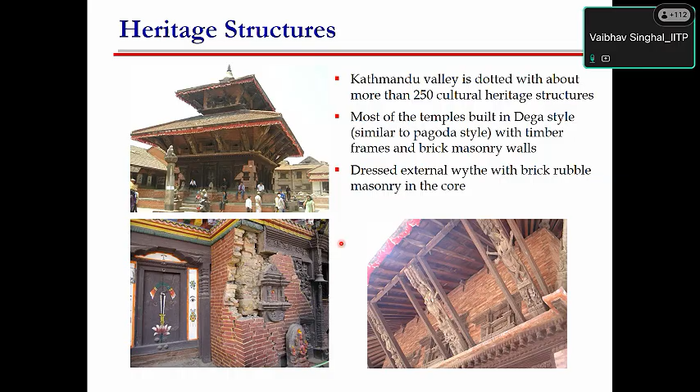This is one photograph after the Nepal earthquake, and especially in Nepal, in Kathmandu, there are a lot of heritage structures. In the southern part of India and in the northern part of India, you see there are a lot of heritage structures all throughout India and many neighboring countries. So why has this seismic evaluation or assessment of masonry gained importance, and why is it important for us being an engineer or being a researcher?

If you know about the recent earthquake, it is not recent, but I can say the recent one which is known to be a mega earthquake or a major earthquake, which happened on the India-Nepal border, where the epicenter was in Nepal.

So during this earthquake, if you will see, this is the bird's eye view of Kathmandu Durbar Square, which has a lot of heritage sites, temples, lots of places, lots of monuments, and this is what has happened after the earthquake. You can see that many buildings were partially collapsed, and the buildings which are in this pink square box have been completely collapsed, while the blue ones have been partially collapsed.

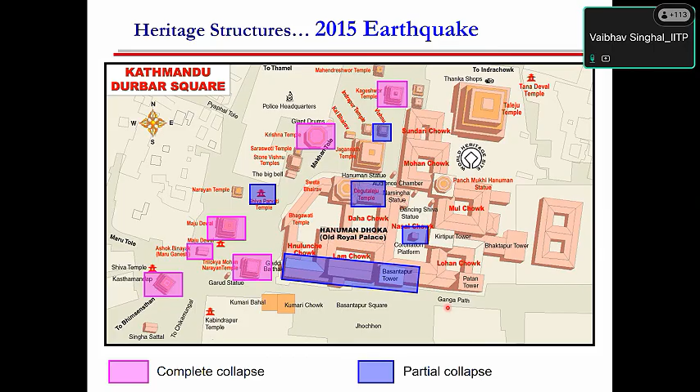These kinds of scenarios were seen everywhere in Nepal after this 2015 earthquake. These are the photographs which you might have seen also in the newspapers. This is the Dharahara Tower before the earthquake, and this is after the earthquake. Many temples, many monuments, many heritage buildings experienced complete collapse.

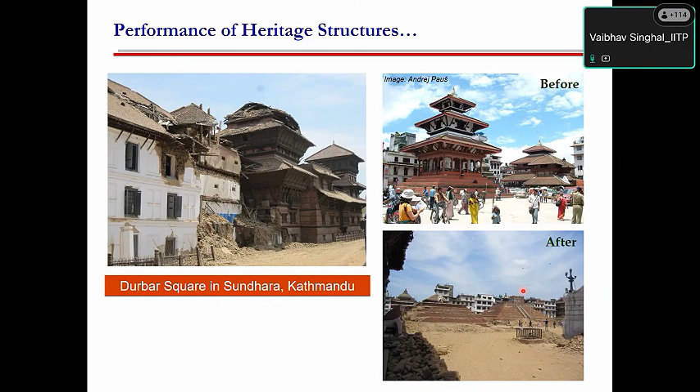This is one of the pictures, one of the temples before the earthquake, and this is after the earthquake. You can see how an earthquake can completely change the cultural heritage of our country or any place. So it becomes quite important that we evaluate and see whether our masonry structures are capable of resisting future earthquake forces or not, and what level of strengthening or rehabilitation is needed for these kinds of structures.

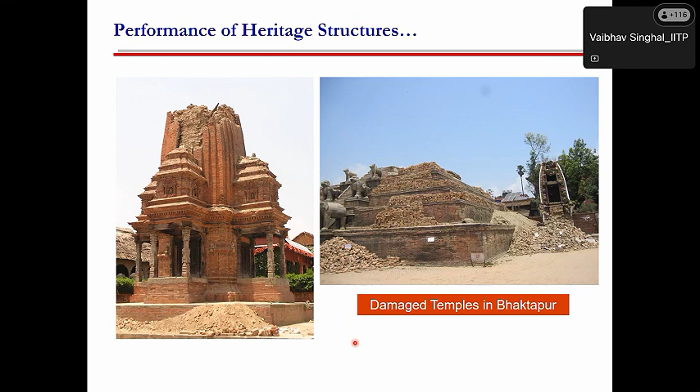Coming to the evaluation, evaluation of masonry structure particularly is not an easy task. Any evaluation has two different parameters which need to be found out: the demand and capacity. Finding out the demand is straightforward—one can do it easily following various design codes or seismic codes to find out how much force will come in future earthquake events or loading scenarios. The challenging task is to find out the capacity of existing structures, especially masonry structures. So this is a big question: how we can find out the capacity of a masonry structure.

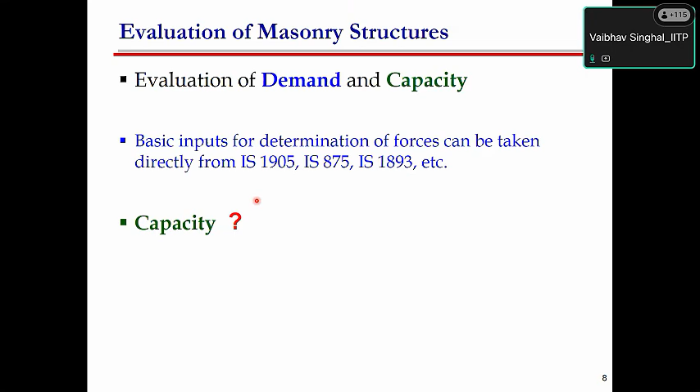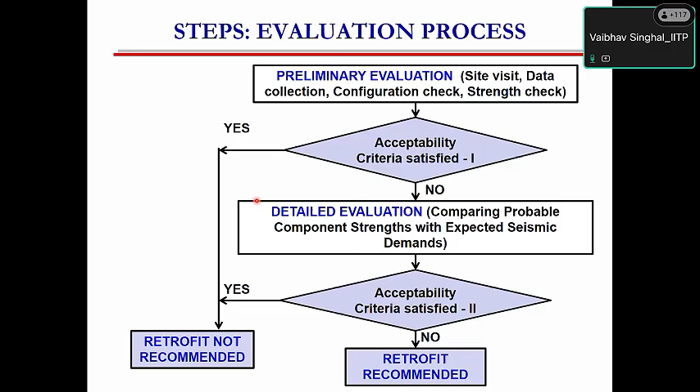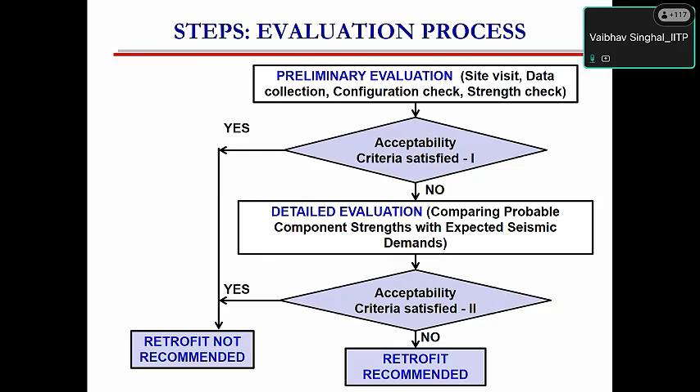Any evaluation process, whether for a masonry or a frame structure, has two basic steps. One is the preliminary evaluation, which primarily consists of site visit, data collection, configuration check, and some acceptability criteria. If it satisfies those acceptability criteria, retrofitting is not required. If it does not satisfy the criteria, then one has to go with detailed evaluation: find out the strength requirement, do detailed testing—non-destructive, destructive testing—do some numerical modeling and analysis, then do a proper check for demand versus capacity. Based on that, one can find out whether the acceptability criteria is satisfied. If satisfied, retrofitting is not required, but if not satisfied, one has to recommend how much retrofitting will be required.

A preliminary evaluation, as you know, is a quick and approximate procedure to find out the potential risk of a building. It primarily involves knowing about the physical condition, robustness, structural integrity, and strength of a structure based on some simple calculations. So what are these simple calculations which one can do?

As per IS 15988, you find out the total area of wall in a particular direction which you want to consider—either horizontal X or horizontal Y direction. Then you calculate the demand using IS 1893 or some other seismic code, and take a ratio of these. If this stress value comes less than 0.1 MPa, then one can say I have sufficient number of masonry walls which can resist the future earthquake forces or demand which may come during any seismic event. This is a basic simple thumb rule which an engineer can use.

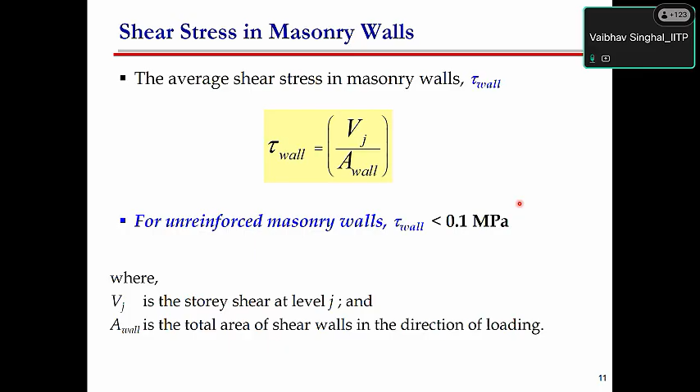Of course, one has to first do some visual inspection. There are some visual checks which can be used to check whether those are satisfied or not. But this is one of the simple calculations which says that if the shear stress or shear demand over the building comes less than 0.1 MPa, you can assume the building will be fairly safe and can resist the forces during a seismic event. So that is a very crude or very simple check.

Now the question comes when we are talking about detailed evaluation—how we can do a detailed evaluation of any building, specifically a masonry building. A detailed evaluation starts with the collection of material, then determining the basic and physical mechanical properties of old material, determining the composition of mortar if required. For that one can do different tests—there are advanced testing techniques available, like acid digestion or SEM analysis. Also, those mortars can be used to recreate the masonry in the lab.

Generally for masonry, finding out the strength is not easy. One cannot do a rebound hammer or a UPV on a masonry structure to find out the strength parameter like we do for concrete. So for a masonry structure, there are some different tests. I will show you some of the tests which can be done at the site.

If those are not possible, then one can also do reverse engineering, try to find out the composition of the raw material used in that masonry and recreate it in the lab, and then find out various properties. In some cases, one can also perform in situ tests and confirm the properties obtained from the lab are matching the in situ properties or not. After that, performing the analysis, you can select the suitable and efficient strengthening scheme for deficient or vulnerable masonry structures.

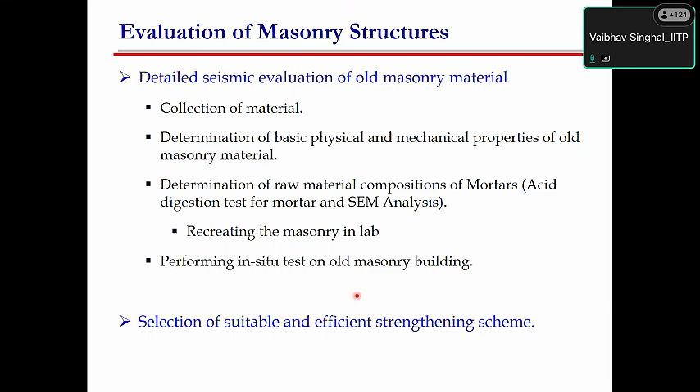So I will take you through some of the case studies which we have done recently. As Dr. Sushant has also mentioned about Nalanda, this is one of the studies which we have recently completed on the Nalanda Mahavihara.

This is called the oldest and the biggest university in ancient times in the world. It is believed that this could be one of the first residential universities in the world, which was almost 2000 years ago. This is one of the sites of the Nalanda Mahavihara. It is distributed in almost 58 acres, and this is one of the popular sites which was found after the excavation.

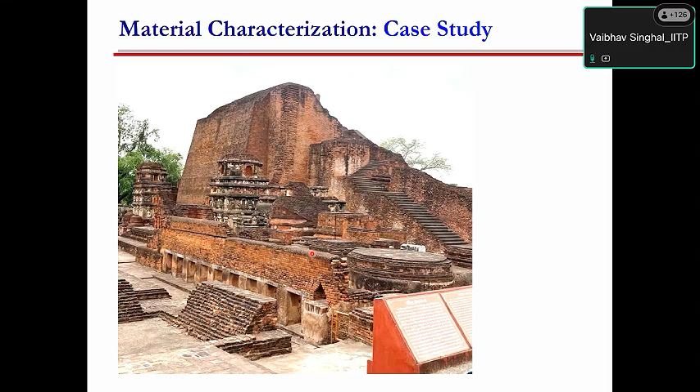So what we did, this Nalanda Mahavihara - this figure shows the complete site map, almost 58 acres with multiple sites. Till now, Archaeological Survey of India has unearthed about 12 to 13 sites at this place, and it is good to see. Those who love masonry should at least visit this place once. You will see how delicate or how complicated masonry construction was done during ancient times.

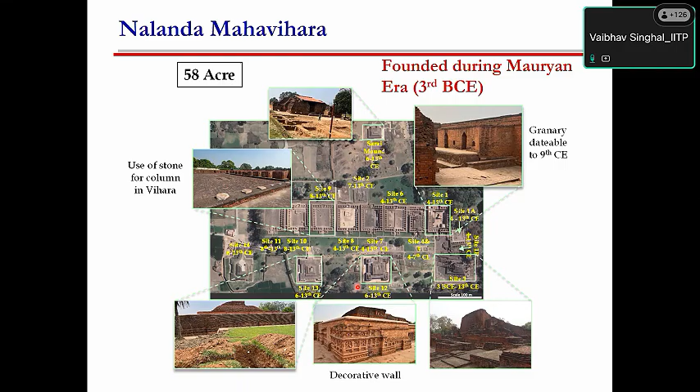So what we did - we got permission from ASI, collected some materials from the site. We collected some brick samples, collected some mortar samples, and then these samples were properly washed. They were cut. The mortar samples were ground into powder and passed through a fine sieve of 75 microns.

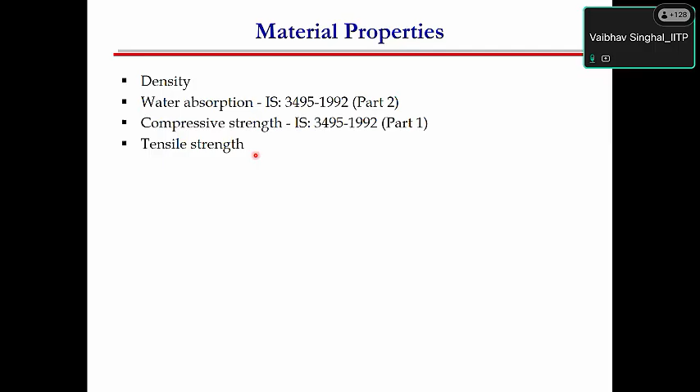And then one can perform some of these tests. If the brick size is good, you can cut them into small pieces and use them for different tests, like for density, for water absorption, for compressive strength, and for tensile strength also. And the mortar samples can be used to find out the binder aggregate ratio so that we can recreate those mortars in the lab.

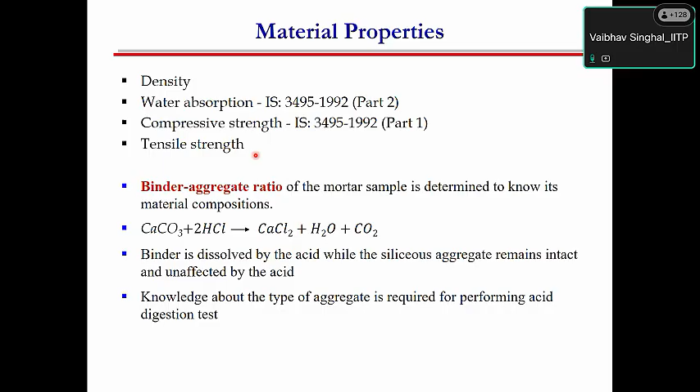So to find out the binder aggregate ratio, there are some simple tests. One of the tests which is very popularly used is what we call acid digestion. The concept is simple - whatever material is inert will not dissolve in the acid, whereas the binder, which primarily consists of lime, will get dissolved in the acid.

There are some specialized equipment and simple chemicals like HCl you can use. By using this test, you can find out the proportion of binder and aggregate. So this is how it can be done. Either you can do simple acid digestion, or you can also use a microwave digestion system to get the results much quicker.

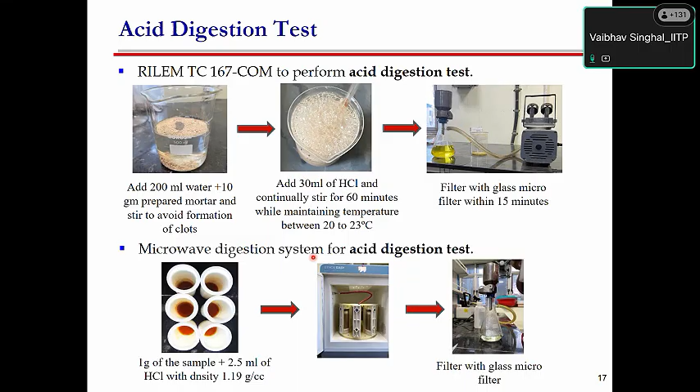So this is how the process is. There are particular sizes of filter papers which have to be used to segregate the insoluble aggregates. What we found out is that especially the render, the plaster used at this Nalanda Mahavihara, has a very high content of binder. So binder to aggregate ratio, we found out almost a ratio of 1:1. That could be the reason why these structures are still durable and have not seen much deterioration with time.

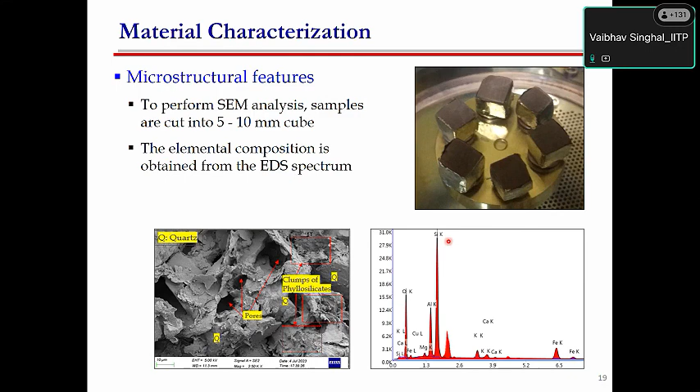You can also know what could be the firing temperature during that time. It was interesting - we have seen that even during that time, the bricks were properly made in furnaces, in brick kilns, and the firing temperature for those bricks was also close to 900 to 1000 degrees centigrade.

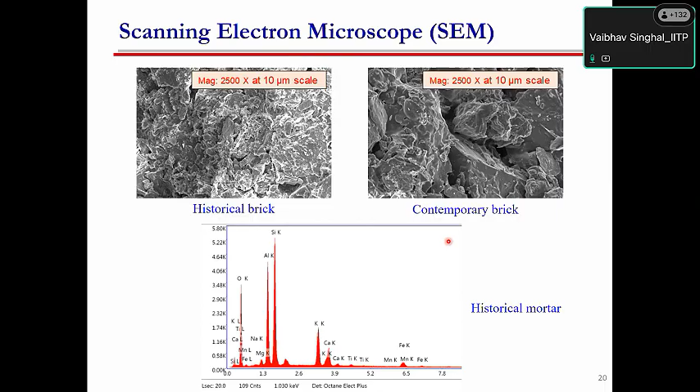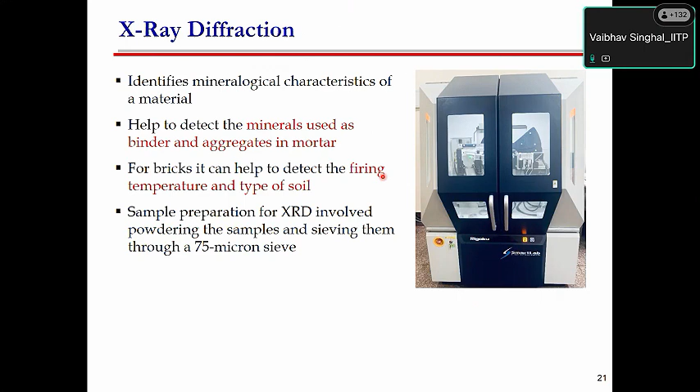So as I said, we found out the mortar which is commonly used for the render or the plaster is a lime mortar consisting only of lime as a binder with some mica mineral, and the aggregates are primarily siliceous aggregates. The firing temperature has been found for the bricks to be more than 950 but less than 1050, so it was in the range of 950 to 1050 degrees centigrade.

So scientifically we were able to prove what kind of manufacturing technique, what compositions have been used in those ancient structures, specifically in the Nalanda Mahavihara or Nalanda University. I'm not going to go into detail of those, it will take a lot of time. So this is one of the case studies which has been done.

Another test which can also be used is thermogravimetric analysis, TGA. This will also help in determining certain properties - again the firing temperature, and the presence of whether there could be some organic materials present in the mortar or in the brick elements. So different tests one can do to find out the type of material used for construction of these ancient or old masonry structures.

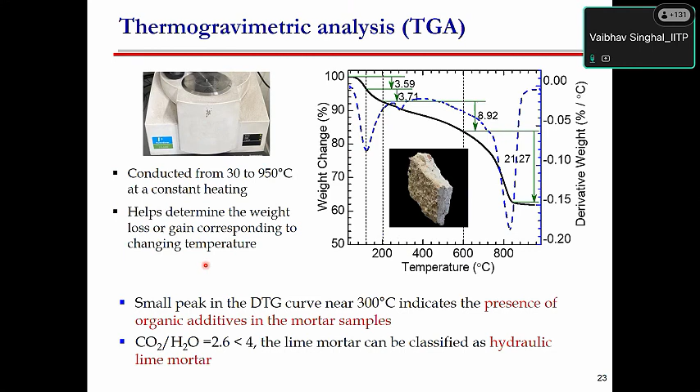We also did a particle size distribution, because to recreate the mortar, you should know the particle size distribution of the aggregates. So we did this using a hydrometer or using some advanced equipment like a laser scattering particle size analyzer.

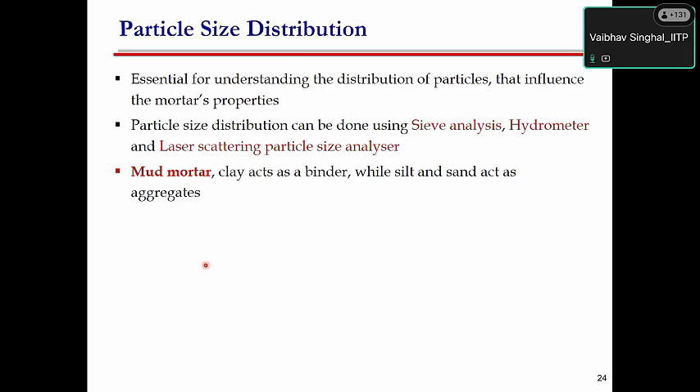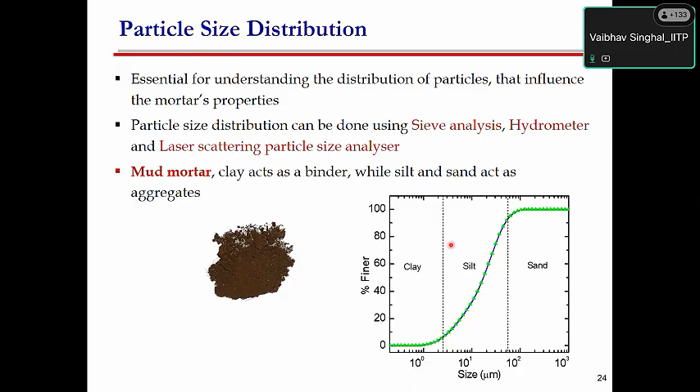Interestingly, another thing we found out is that for the bed joint in those times they were primarily using mud mortar. So this is the sample of mud mortar which has been taken from that site, and this is how the particle size distribution of this mud mortar looks like - primarily consisting of silt and some part of clay and sand.

So in summary, for this case study, we were able to evaluate the various types of materials. So now the next part, what we are doing right now, is we have recreated this masonry, the ancient masonry, in our lab, and are trying to find out what could be the properties, like the elastic properties, the compressive properties, or the shear strength properties.

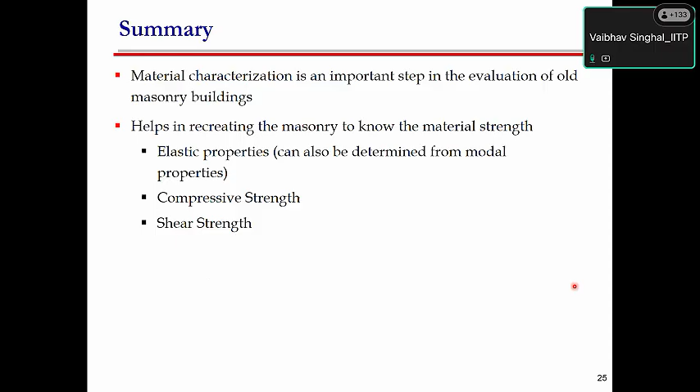And then to know more in-depth about these structures - how they could have been designed, how the proportions and sizes of these structures have been evaluated - and what good things we can learn from these ancient structures which we can incorporate in our modern design and modern construction practice.

Now, many engineers and researchers ask what kind of in-situ testing we can do for masonry to find out strength parameters like shear strength or compressive strength. And a common misconception is to use the rebound hammer and UPV. We have seen many consultants who claim to be evaluating old masonry structures using the rebound hammer, but using rebound hammer directly for masonry structure is not applicable.

You cannot use them directly because whatever rebound hammers are available are mostly calibrated only for concrete. So you have to either calibrate it for a particular type of brick, or test a lot of bricks and find out some kind of calibration curve - that if the rebound values are these, it can be interpreted as this much brick strength. So a lot of data has to be collected, and the rebound hammer has to be calibrated for masonry structures.

But the challenging thing is that you can only know the strength of a brick, you cannot know the strength of a masonry. For that, you also need to find out the strength of the mortar and then use some equations. So right now we are doing some work, and some work has already been done in Europe recently, where using the rebound hammer you can find out the strength of a brick, and using tests such as a pull-out test you can find out the strength of a mortar, and using some analytical equation, you can then find out the strength of the masonry.

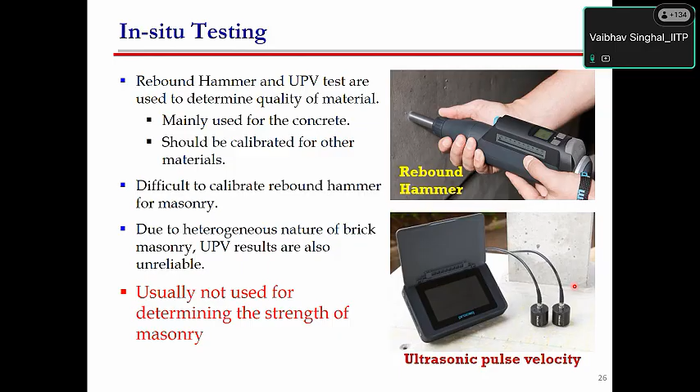UPV - so all these tests directly are not applicable. So if somebody is using or recommending this, please do not use the conventional UPV and conventional rebound hammer for finding out the strength of masonry.

So the tests which can be done. The first test is called the flat jack test. In India, we do not yet have an IS standard on this, so you can follow the ASTM standard. This is called the flat jack test.

What is done in the flat jack test? We cut a slit, remove mortar from some part, and then insert these plates. These plates are primarily thin jacks, hollow plates where the oil will be pumped inside.

You put two plates, one at the top, one at the bottom, and then apply pressure. Then you can put some sensors or dial gauges to measure the deformation. This test can give you the compressive strength and the elastic modulus of the masonry present at the site. So this is a very good test.

Of course it's slightly difficult to do. You have to cut the slot and then insert these flat jacks, and these flat jacks can only be used not more than 3-4 times, because when they get inflated, due to permanent deformation you cannot reuse them again and again.

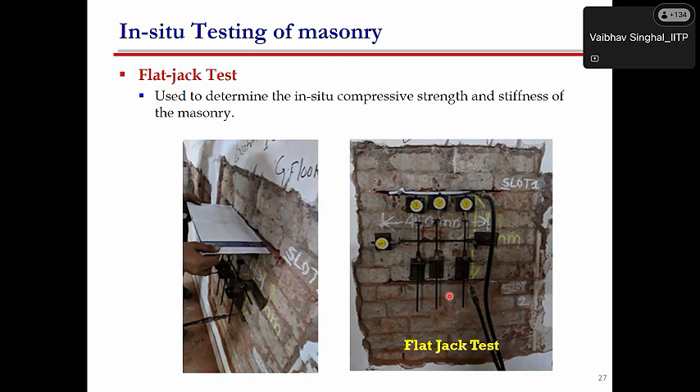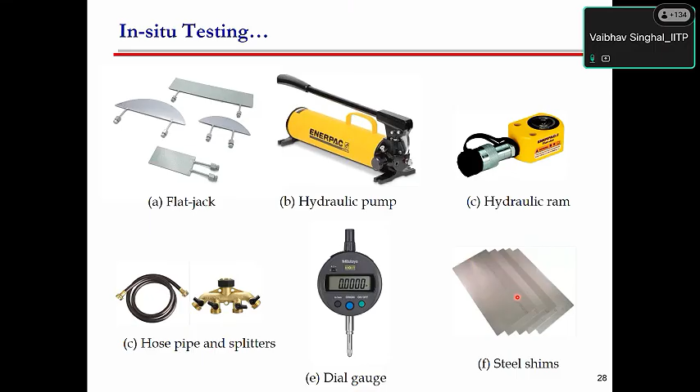So these are some photographs from a recent assessment we did along with the state government of Bihar. Cutting the slots, you can see here how the slots were cut, then inserting these flat jacks, placing the dial gauges.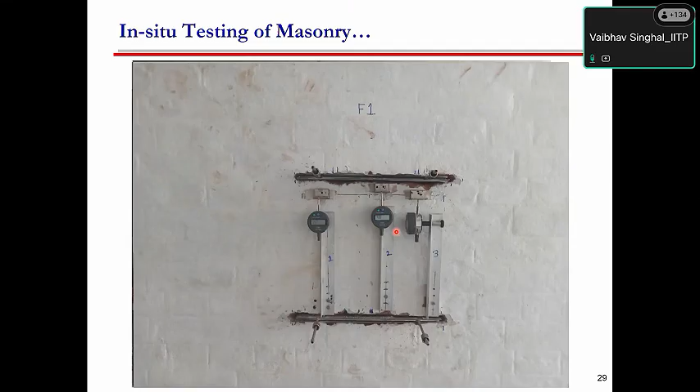So this is how the dial gauges have been placed, and then applying the pressure. After the testing, you can seal it and nobody will know you have done some test there.

So the previous test, the flat jack test, can give you primarily the compressive strength and also the elastic modulus, which is required for the designing and for the modeling purpose.

The next test, which is quite important especially for seismic evaluation, is the shear strength test. The in-situ shear strength can be found out using a test called the Shove test.

In this test, you can see here, we remove one brick from this end and another brick from behind. The pressure jack is placed here, and then the middle brick is pushed. At whatever force this brick slides, that force you can call the shear strength or sliding capacity of the masonry.

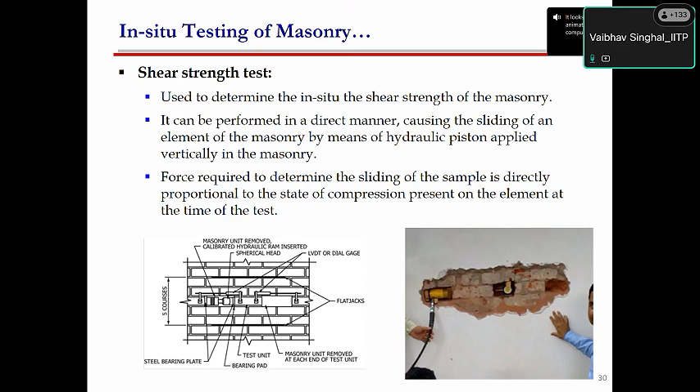This is also a simple test which can be done easily. Here are some photographs: one half brick is removed here and one slot is created here. At one place you can put a dial gauge to note down the slip and the deformations, and then this small jack is placed to push this middle brick.

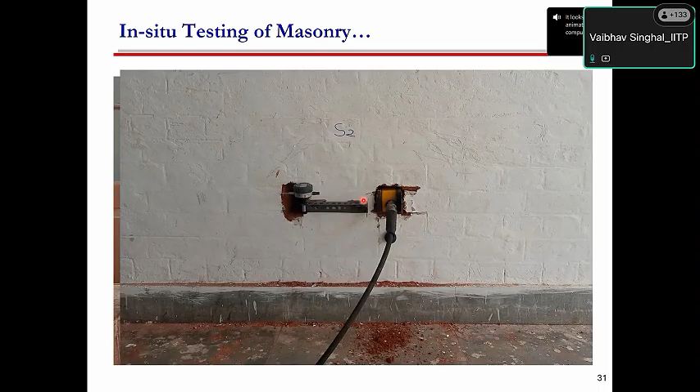This is one of the tests we have done for about 10-15 buildings; I'm just showing you results of 3 buildings. In one building, we found that the shear strength is very, very low, 0.08. If you remember, I gave you a number of 0.1 as per IS 15988.

We also did a detailed assessment and found that this building was unsafe for resisting earthquake forces. Whereas for the other two buildings, the shear strength was quite optimum, quite good: 0.66 and 0.4. We were also able to find the average compressive strength, 2.5 and 2 MPa, and the modulus. This is how you can find out from all this testing.

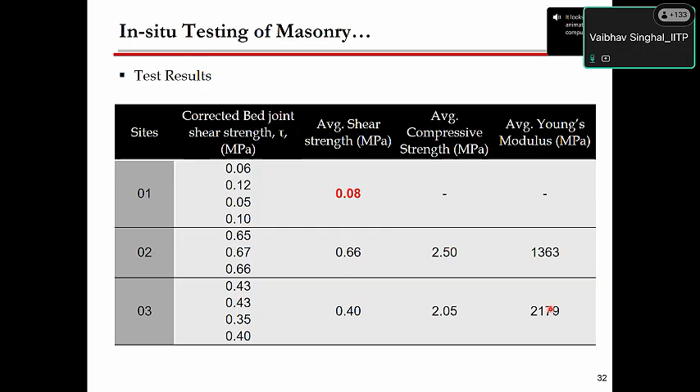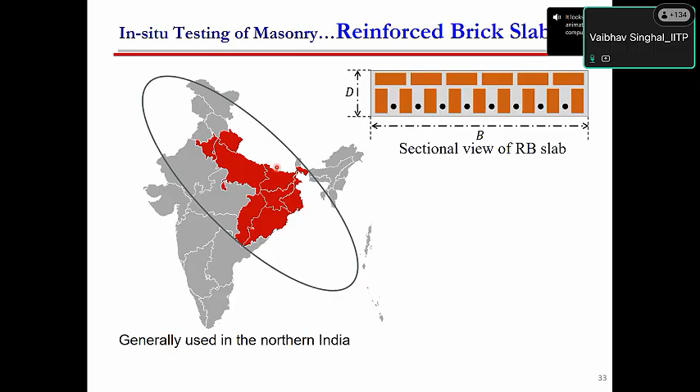So this is another major issue which has been seen in India. If you look at the major part of India, especially in the northern part, and also the eastern and northeastern part, you will see that in many of these states, there has been use of reinforced brick slabs. Now these reinforced brick slabs have been deteriorating quite fast.

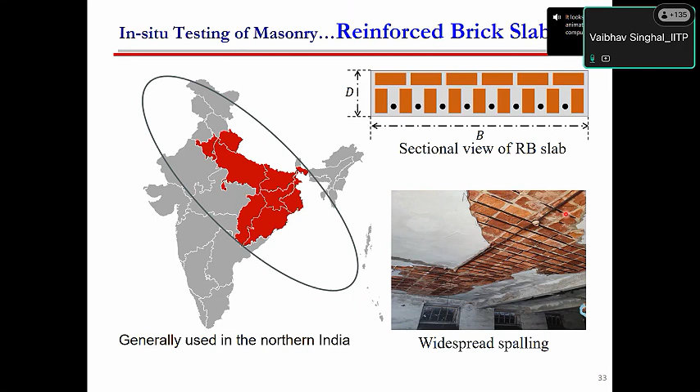There are a couple of requests, many asking how we can assess whether reinforced brick slabs are safe or not. If it has to be retrofitted, how much retrofitting is needed. And after retrofitting, how we can see whether the strengthened slab is meeting all acceptability criteria. For this, you can do a slab test.

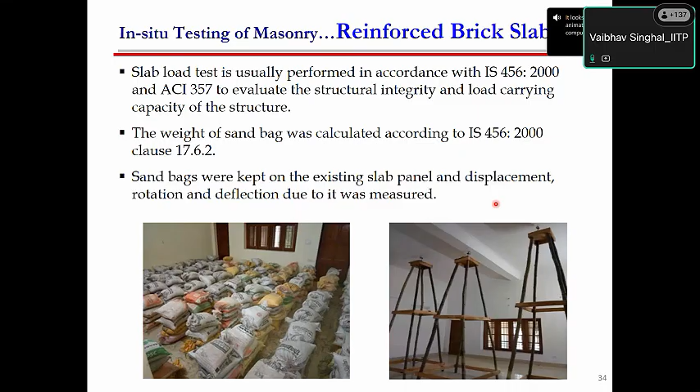Then the question comes from researchers, students, and engineers: what should we do with these values once we know the strength parameters? One simple thing you can do is go back to simple equations, find the total shear demand of your building, and divide it by the capacity. If that demand-capacity ratio comes out less than 1, your building is safe and does not require strengthening. But if the demand to capacity ratio is more than 1, then some strengthening is required for that building.

To perform detailed analysis, in some cases these simple calculations are not possible because we do not know how much mass is participating in the first mode or second mode, or which wall will be participating. If you want to know in more detail about the performance of a building, you can take help of various tools, do numerical investigation. There are a lot of new analysis techniques now available and upcoming.

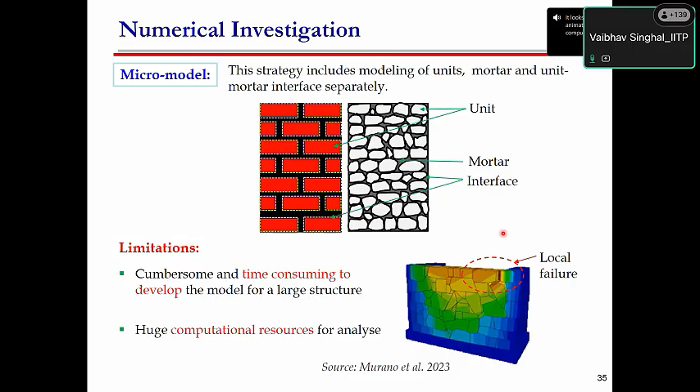One of them is numerical analysis using various modeling methods. I'll start with a more complicated one, which we call micro modeling, where we try to model each brick and mortar. Using this kind of modeling, you can also know about local failure, understand how the wall will collapse, how the building will collapse, which element will fail first, and know various minute details about the performance of a building. However, such modeling techniques are quite cumbersome, take time, and require good computational resources for analysis of buildings modeled using the micro modeling technique.

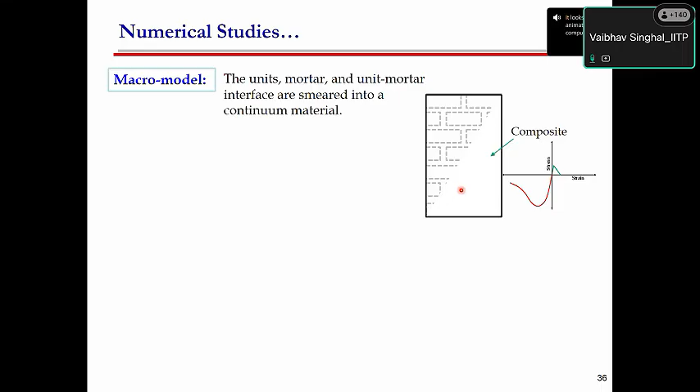The next method, a simplified one used by many researchers and engineers, is the macro modeling technique, where we simply model the wall as a continuum or composite element and define properties like compressive and tensile properties. The limitation of this methodology is that you cannot know about localized concentration of forces or stresses, and you cannot know about the cracking pattern, though indirectly one can know about it using plastic strain contours. Also, you will not know about various interface behaviors, whether the failure will be a sliding failure or a diagonal shear failure. So it is difficult to assess those minor details from macro modeling.

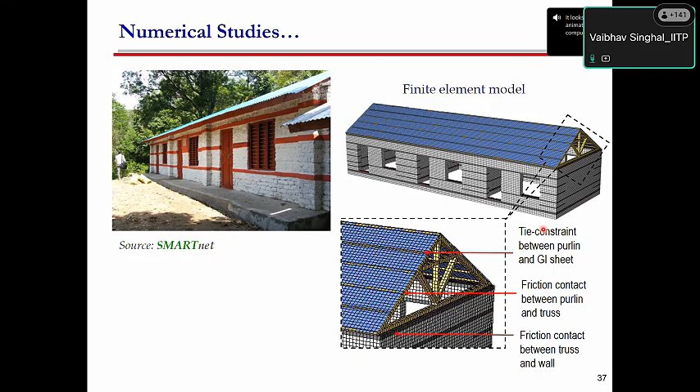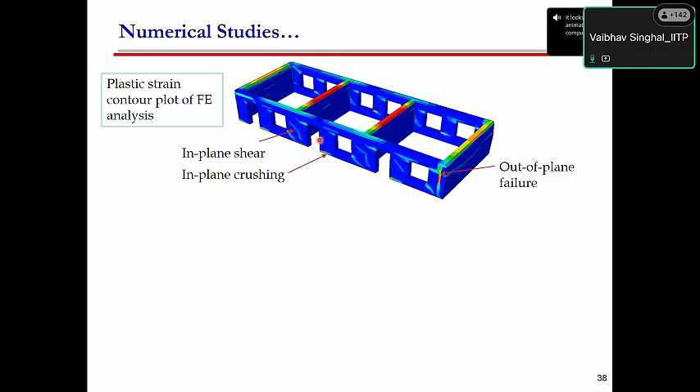These are the tools you can use to find out, for example, how you can see the strain contours, the plastic strain contours. You can see that some walls might be facing diagonal failure, there can be out-of-plane failure of some walls. All this information shows high plastic strain near the openings, so openings need to have proper confinement. All this information one can gather to find out what could be the common failure.

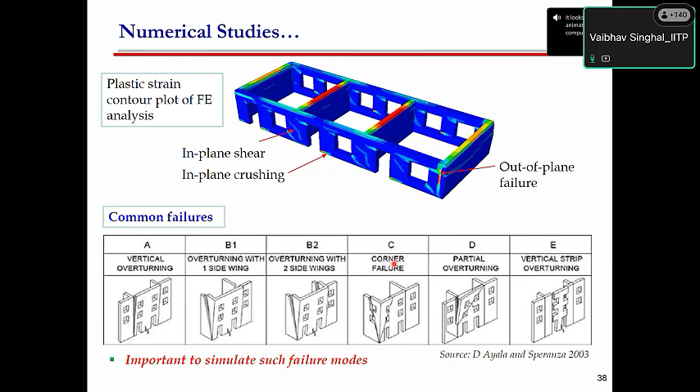So what we did recently, seeing the demand for how buildings can be evaluated and how one can get a better understanding of the responses, recently we have developed this macro discrete element method.

Then of course you have to assign the interaction properties, because all these blocks will have some interaction properties: there will be sliding, there will be cohesive properties. We did a lot of experiments and proposed the interaction response at different locations - for a horizontal one, for a diagonal line, for a vertical line. So different interaction properties have been suggested.

You can go to my website or my Google Scholar. Recently the paper has been published also in Engineering Structures, where you can know more detail about the various interaction properties.

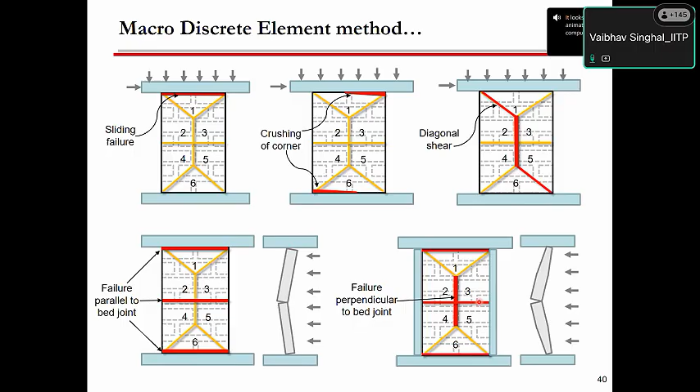The advantage with the macro discrete element method is that you will be able to simulate different failures, such as sliding failure, crushing failure at the corner, and diagonal shear failure. You can also simulate out-of-plane failure, so in this case you can have cracking - these red color lines show the possible cracking line. If there is two-way bending, you can also simulate the two-way bending failure.

So those are the numerical analyses. I will conclude my presentation with another case study which we did when I was at IIT Kanpur, on a Lucknow monument, where you will see how starting from material characterization and evaluation, numerical analysis can be used for assessment.

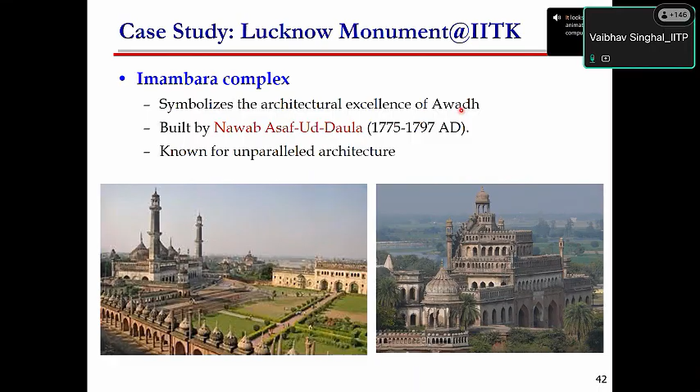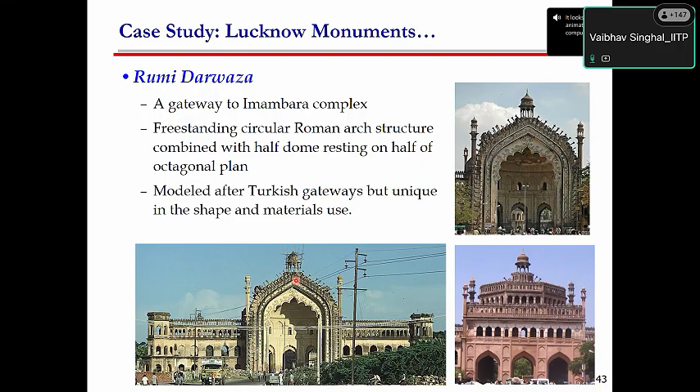If you have visited Lucknow, there is the Imambara complex, built about 300 years ago, with a lot of typical Mughal construction - arches, domes. One of the structures there is Rumi Darwaza, a kind of gateway entrance to this historical place. We were interested to evaluate the performance of this complex because there were some cracks developing in the dome, in the top part of the dome, so we were quite excited to see how we could evaluate this monument, this particular gateway.

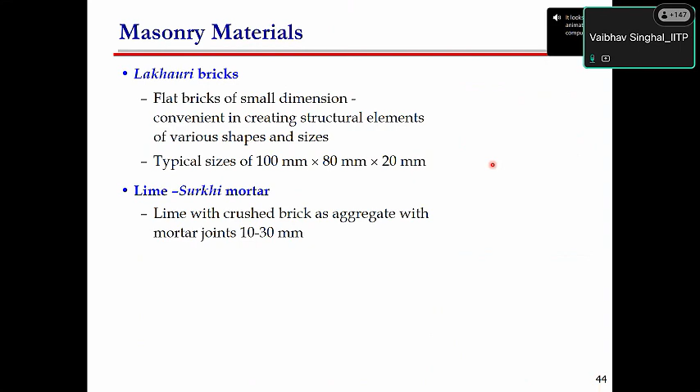So what we did was some initial investigation - we did a site visit and found that the bricks which have been typically used are of a small size.

A typical size is equal to the size of a palm, so 100 by 80, and the thickness is 20 mm. But the thickness of the mortar is quite large. This is completely different from what we found in Nalanda. Nalanda has a typical thick brick, a bigger brick, but a very thin mortar, not more than 3-4 mm. Whereas in these monuments, especially from the Mughal era, it's totally different.

They have a thin brick but a thicker mortar. So these are some of the damages which have been seen, and we want to evaluate this historical structure.

We started with material collection. We collected the material, did material characterization, simulated the mortar, found out the binder-aggregate ratio, and then did the seismic evaluation of that dome.

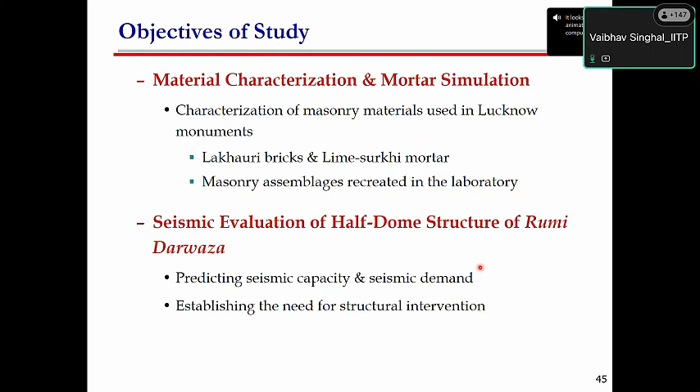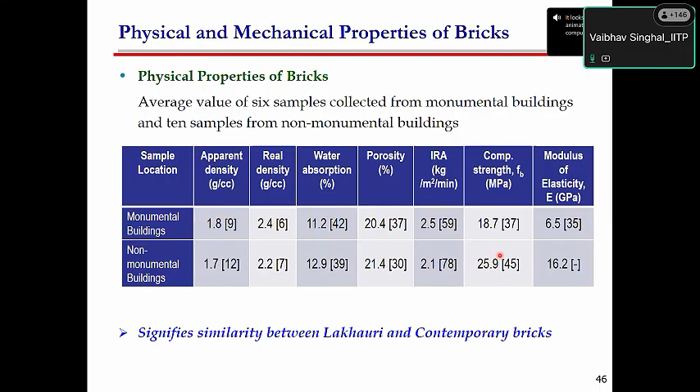These are the properties of the brick. Brick samples were collected. You can see the density and water absorption were quite good, showing the bricks were of good quality, and they had significant strength, about 18 to 25 MPa.

Then we moved to material characterization to know more about the bricks, their composition, and compared them with contemporary bricks available today. We found that the bricks from the Mughal era and the bricks we currently use are nearly the same—not much difference.

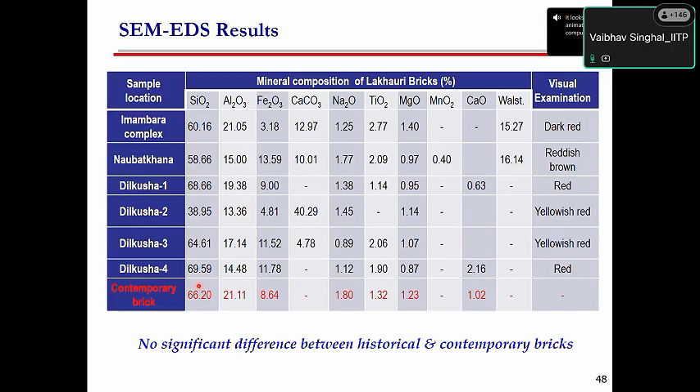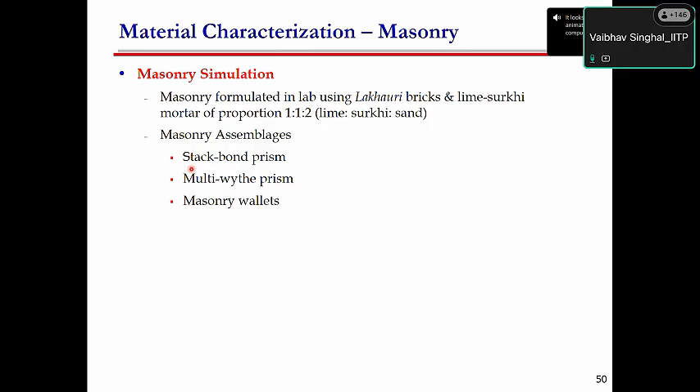Using the properties of the bricks and the properties of the lime, we recreated the lime in the lab and developed some specimens: first a stack bond prism, then a multi-wythe prism, and then masonry wallets for finding the tensile strength or shear strength.

We formulated the masonry, finding the mechanical properties using the stack bond prism and multi-wythe prism, then the elastic modulus, and then the diagonal tensile strength. This is the first test.

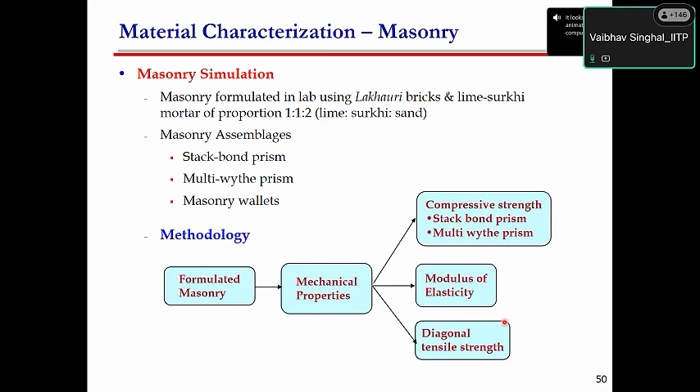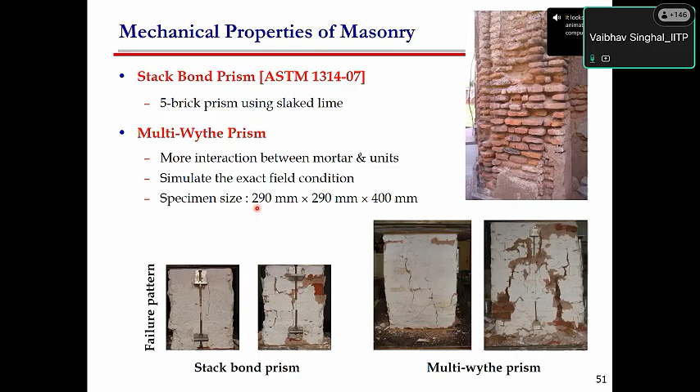This is the 5-brick prism test, a small specimen. And since these walls have multiple layers of brick, we also did a multi-wythe specimen, with specimen size of 290 by 290 by 400.

This is what the results found. For the masonry, the strength was 3.5 MPa, and the modulus was quite low, 315. This shows that the lime mortar provides high plasticity or low modulus, which is good—this could be why these structures are still standing today.

They were able to absorb various earthquake shakings. The multi-wythe prism, as expected, had a lower strength, 2.09 to 2.1 MPa, and also a lower modulus.

We also compared the results with traditional or contemporary masonry. You can see this blue color line is the historical masonry. The historical masonry's response is quite soft, which also shows that it is quite flexible.

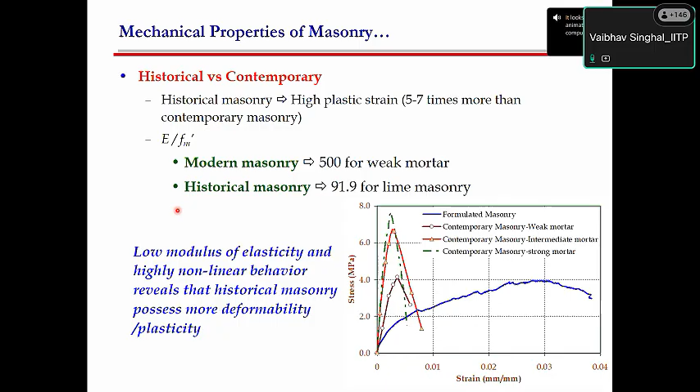Whereas the conventional masonry, even the weaker one, has a significantly higher elastic modulus compared to the historical masonry. This could be a reason why these older masonry structures are still standing, without much damage in the last 1,000, 300, or 500 years. Low modulus of elasticity and higher nonlinearity reveals that historical masonry has more deformation and plastic capacity.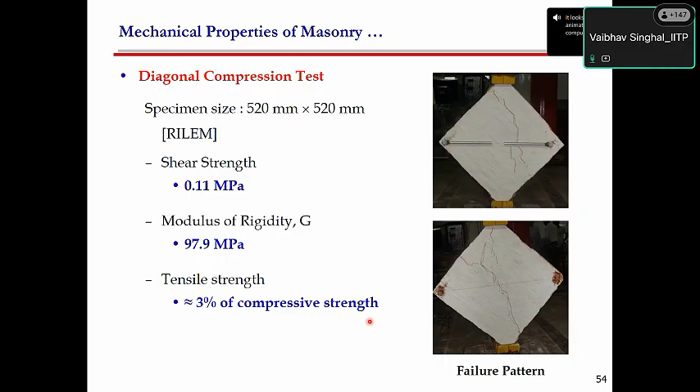This is a diagonal compression test, commonly used to find the shear strength or tensile strength. The shear strength was found to be 0.11 MPa, which is quite low for this type of masonry. Remember this number, 0.11, we will see it again in the analysis part. The tensile strength is approximately 3% of the compressive strength.

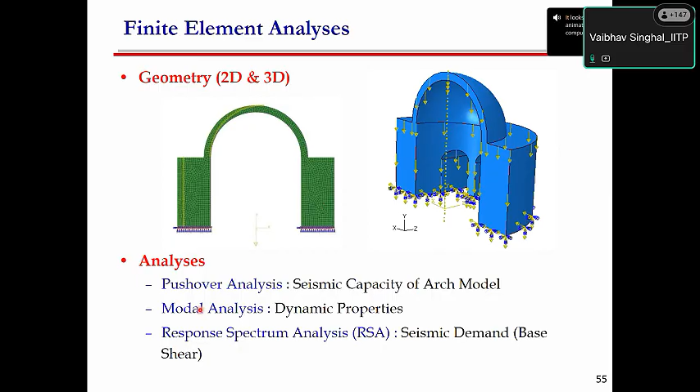After finding the properties—elastic modulus, compressive strength—a finite element analysis was created. We did both 2D and 3D analysis, performing pushover analysis, modal analysis, and also response spectrum analysis to find the seismic demand and capacity.

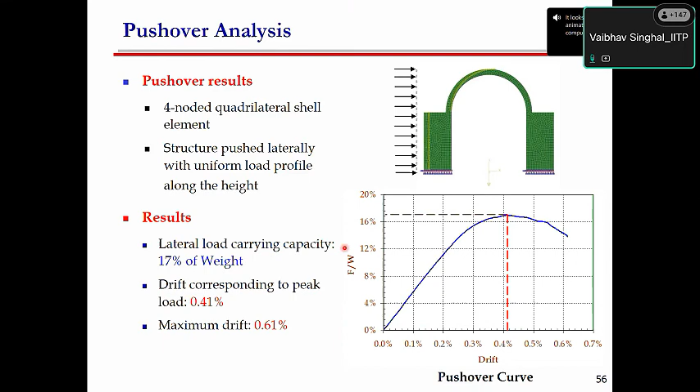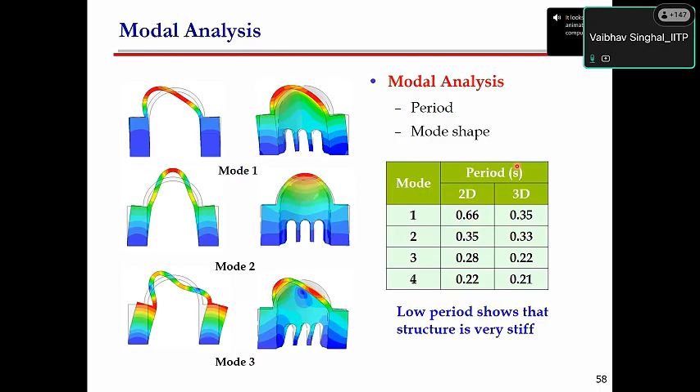Then we did a modal analysis to find out the frequency, comparing the 2D and 3D. Of course, 3D will give you a stiffer response, so 3D time periods will be much lesser compared to the 2D one.

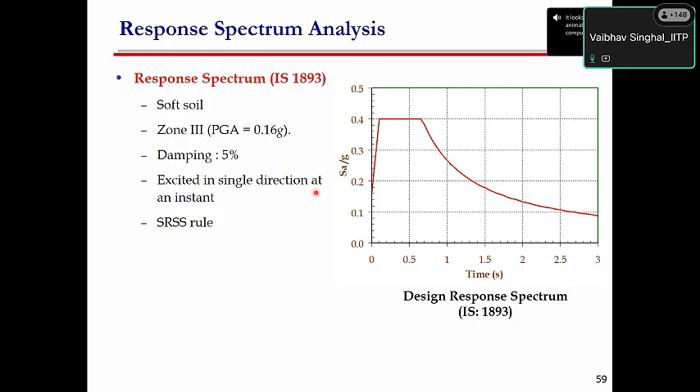Then using the response spectrum analysis, assigning Lucknow lies in zone 3 - this is the older IS 1893. Using this response spectrum analysis with the SRSS rule for combination, this is how the results of a response spectrum analysis look like.

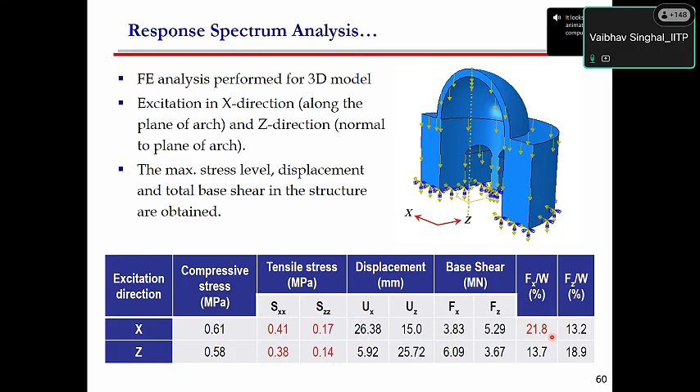The demand, which is the seismic weight demand, is more than the pushover capacity which was found out. If you remember, the pushover capacity was found to be 17, but here in one direction it was found to be 21.8, 22. So the tensile stress exceeds the demands.

The base shear of 21.8% of its seismic weight in the plane of the arch is critical for the earthquake, and that is why there has been some damage in the structure because its capacity has been reduced by time, and it is required that it has to be retrofitted or strengthened.

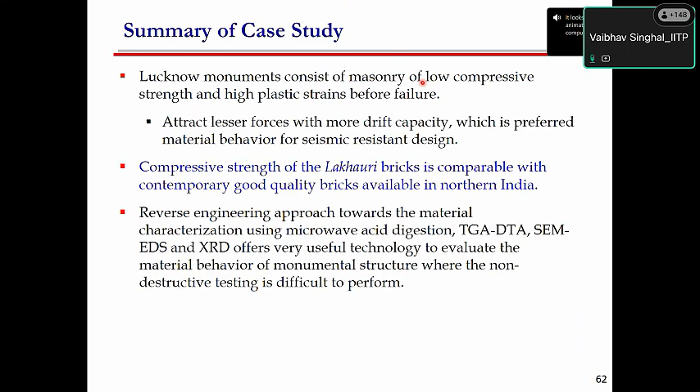So, the summary of this case study is that we were able to do the complete understanding of this project - starting from material characterization to seismic evaluation using numerical analysis based on the properties obtained from the test, and then using those properties to find out the possible failure and whether strengthening of this structure is required or not.

So that is all from my side for today.

Let me see what are the questions. Yes sir, thank you sir, thank you sir. Very informative session, and you showed a lot of in-situ testing methods and the case studies, and it will definitely be helpful for our participants.

What software is used for FE analysis? It is up to you, you can use any software. We commonly use Abaqus here, you can use ANSYS also - any general purpose software can be used. Of course, it cannot be done using structural analysis software like SAP or StaadPro, those software are not capable of having those simulations. So Abaqus, ANSYS, and there are some other softwares which can be used.

Which software is used for pushover analysis also, micro? Sir, you use Abaqus - yes, for pushover also we use Abaqus. Nowadays in SAP you can use SAP also, since SAP now has 2D elements with nonlinear properties. The problem is that most softwares, especially commercial software for structural analysis, do not have nonlinear properties for plate elements or 2D elements. For beam elements, column or beam, you can assign hinges and do the pushover analysis, but for these plate type of structures, you have to use either Abaqus or ANSYS.

One candidate is asking about Plaxis. Yes, Plaxis can be used, but it is primarily for soil, for the foundation part. So you may not get some constitutive models which are used for concrete or masonry. But yes, it is possible, you have to find out the correct constitutive model. But I am not sure, I have not used Plaxis myself. Our colleagues in geotech used to use it, mostly for understanding soil structure interaction and soil behavior. So far as I know, Plaxis is being used mostly for geotech applications.

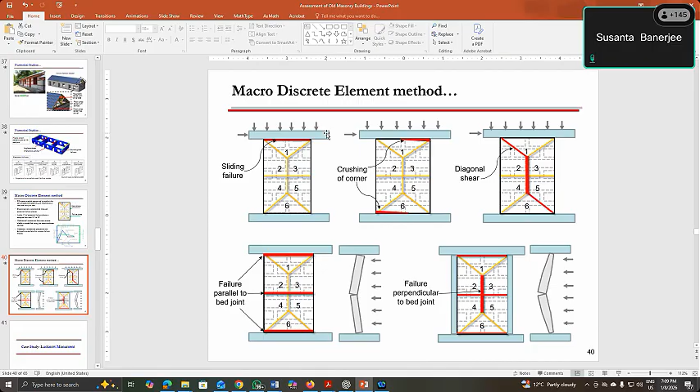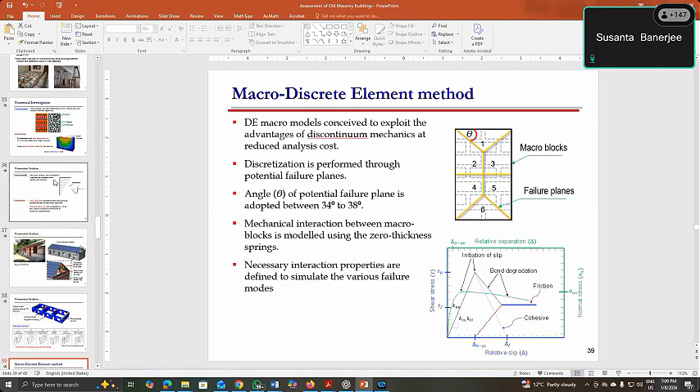Are you asking about the macro block or only macro? No, if I do the macro model instead of micro model, if I model one wall in macro with one opening.

So if you keep an opening in between, you will not see physically the cracks there because you're having a single unit.

So what we generally do is we used to see the values of plastic strain, where the strains are getting maximum. So that can be the possible location of the cracks.

So when you have an opening, you do the analysis, and from the corner of the opening you will see those higher plastic strains, which shows that those could be the possible failure planes.

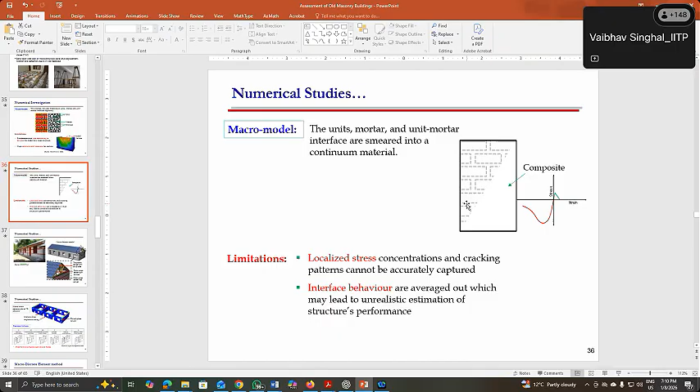Sir, I have one question. Just while showing your presentation, you showed the flat jack test.

Sir, another popular in situ testing is the masonry core testing. So for compression and all those, masonry core testing is also done. What do you suggest, which one gives the more reliable results?

Masonry core testing is becoming popular, but still it is not standardized. RILEM is working on standardizing that core testing of masonry.

But if somebody is using it, then please use it carefully, because the problem with the masonry core is that the results will be highly dependent on the location of the joint, whether the joint is coming parallel to the core, perpendicular to the core, or at some other angle.

So right now, detailed work is going on.

There is a special committee formed with RILEM, where researchers from different universities are working to standardize core testing for masonry. But right now it has not been standardized, so you cannot have a correct assessment using that.

Yes sir, I'm happy to be part of this. I'm also part of that committee, actually. Great, great. Actually, they are doing round robin testing.